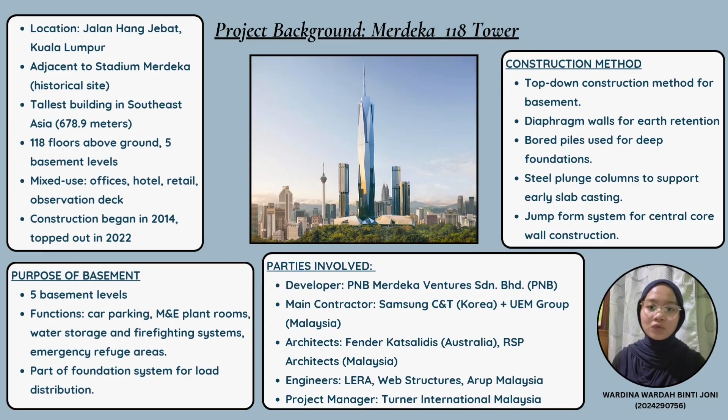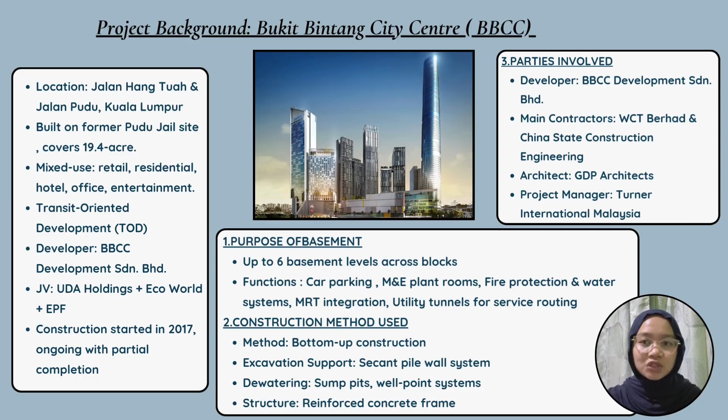So for the method used for basement construction in this project, BBCC used the bottom-up method, which means full excavation was done first, followed by construction from the lowest level upward. Secant pile walls were used for excavation support and groundwater control. Next, dewatering systems like sump pits and well points were installed to manage water levels. And the last one is the structure above is made of reinforced concrete, ensuring strength and long-term durability.

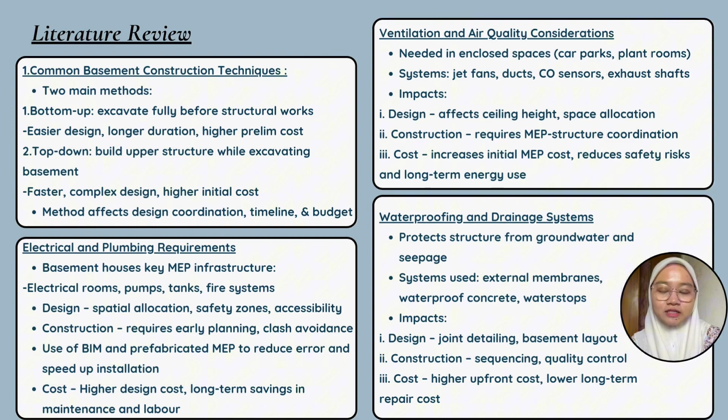Last but not least is electrical and plumbing requirements. Basements typically house essential mechanical, electrical, and plumbing components like electrical switch rooms, water tanks, and fire pump systems. These services require careful design planning to allow for safety zones, accessibility, and ventilation. So in summary, these literature insights highlight how basement construction involves not just excavation and structural work, but also careful integration of systems that impact design quality, construction efficiency, and overall project cost.

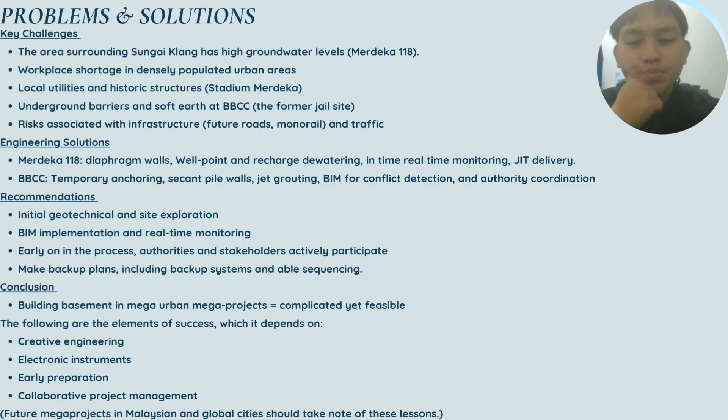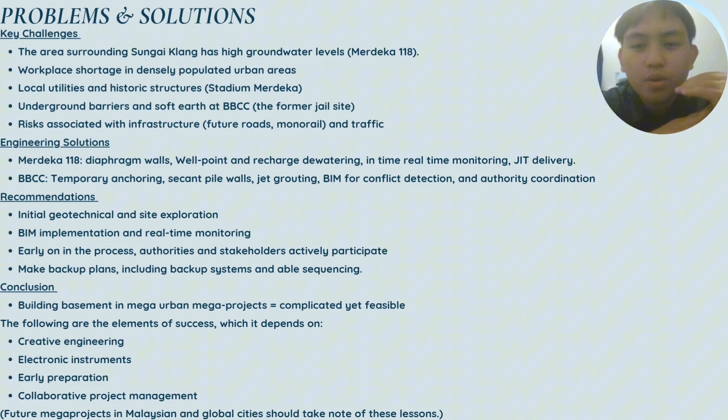At BBCC, they applied temporary anchors, secant pile walls, jet grouting, and used BIM for clash detection and better coordination with authorities. Based on this, we recommend early geotechnical site investigations. The second one is BIM implementation and real-time monitoring. The third one is active involvement of authorities and stakeholders from the start. And last but not least, preparing backup plans with flexible sequencing.

In conclusion, basement construction in urban mega projects is complex but achievable. Success depends on creative engineering, digital tools, early planning, and of course, strong teamwork. These lessons are crucial for future mega projects in Malaysia and around the world.

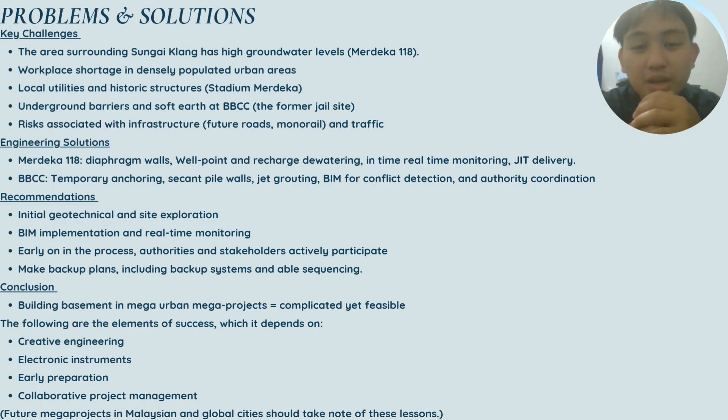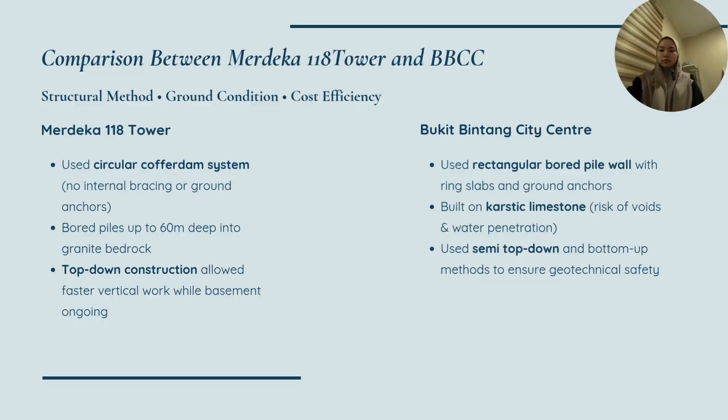From a cost and value perspective, both projects had different priorities. Merdeka 118 incurred higher initial costs due to advanced methods and materials, including ultra-high performance concrete. However, this was justified by a shorter construction timeline and strong long-term value, supported by green certifications like LEED and GBI, emphasizing sustainability. Bukit Bintang City Centre, on the other hand, focused on cost efficiency.

Their use of plunge columns allowed parts of the building to rise above ground even as excavation was ongoing. With a phased investment strategy, they could hand over components like retail areas earlier, bringing in revenues sooner. This approach effectively balanced cost control, safety, and practical functionality.

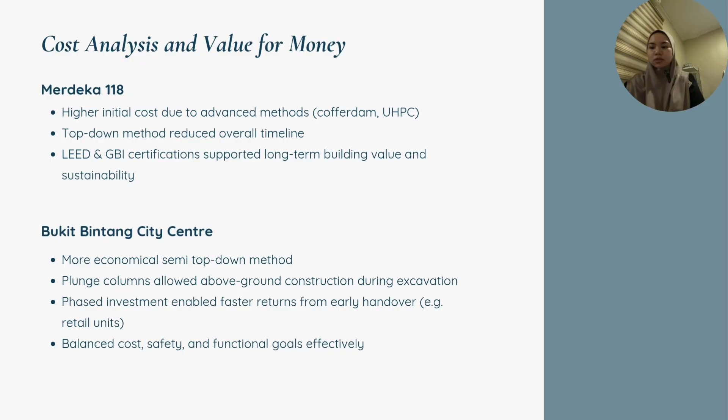So for the conclusion, both Merdeka 118 and BBCC are redefining engineering excellence in their own ways. Merdeka 118 stands as a symbol of supertall innovation. It features 138 drilled piles, a circular cofferdam into granite bedrock, and a semi top-down method for faster construction.

It was built using eco concrete, which is C105 MPa, achieving LEED and GBI Platinum ratings. It showcases height and strength with strong environmental values. Though the build required a high upfront investment, it delivered long-term value in sustainability and global prestige.

In contrast, BBCC reflects urban rationality and geotechnical care. Engineers used CBP walls, jet grouting, and staged construction to handle karstic limestone and the Pudu Prison legacy site. It prioritized cost-effectiveness, integrating MRT and LRT, using plunge columns and applying partial turnovers to enhance commercial success. Its design approach focused on functionality and safety with flexibility for mixed-use development.

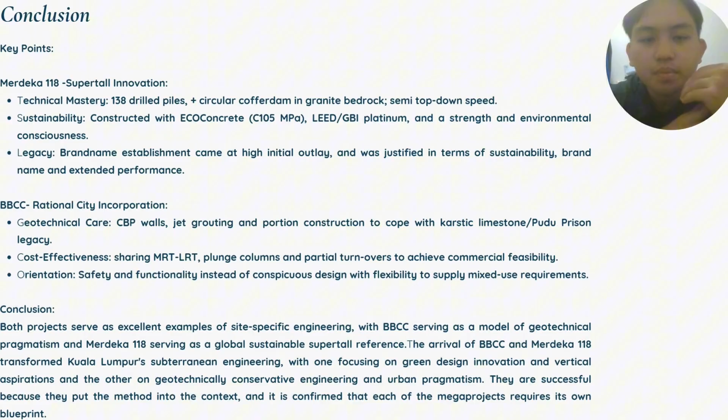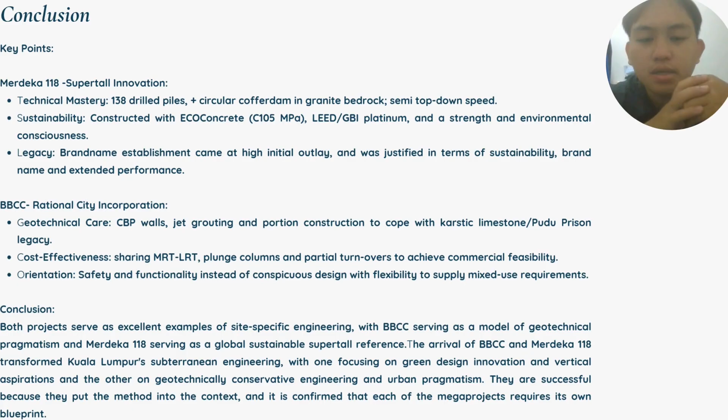In conclusion, both projects are powerful examples of context-driven engineering. Merdeka 118 represents a new global benchmark in sustainable vertical construction, while BBCC demonstrates pragmatic urban design grounded in local geotechnics. Their success proves that every mega project needs its own tailored blueprint, combining innovation, site conditions, and long-term visions.

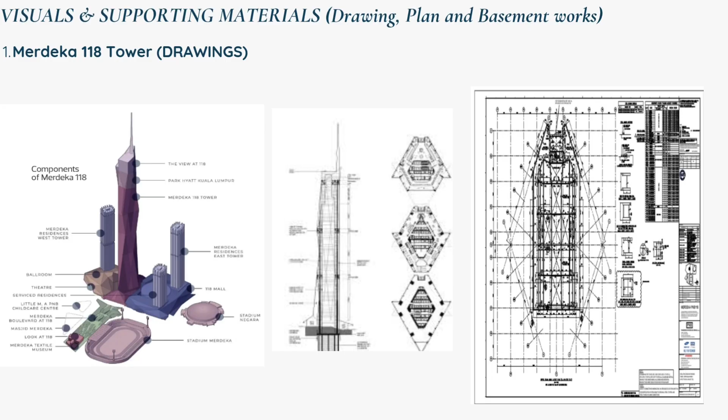So I will explain a bit about this floor plan because it is quite unique, which is Merdeka 118. It is a super tall skyscraper in Kuala Lumpur, standing at 678.9 meters. The floor layout follows a diamond shape, reflecting the tower's iconic architectural design. At the center is the core, which contains mechanical, electrical and plumbing, which is MEP systems, executive offices, staircases, and emergency shafts.

Surrounding the core are square-shaped office spaces, each about 10.5 meters deep, allowing for better natural lighting and flexible interior design. This layout offers several key advantages: first, efficient use of space; centralized vertical transport and services; and last but not least, improved structural stability through a strong central core.

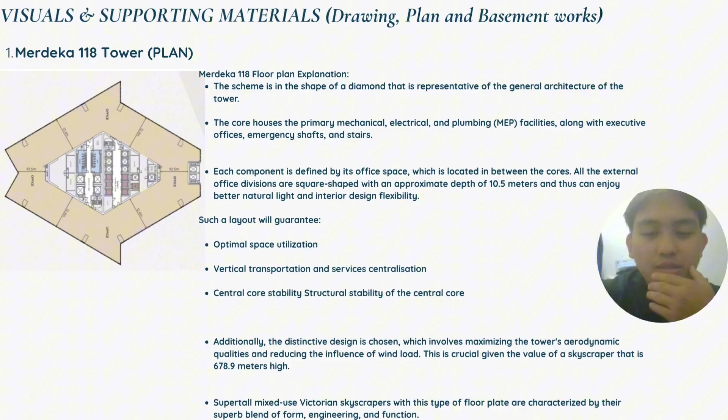The diamond form also helps improve the tower's aerodynamics, reducing wind pressure, which is essential for such a tall structure. So overall, this floor plan reflects a perfect balance of form, function, and engineering, typical of world-class mixed-use skyscrapers.

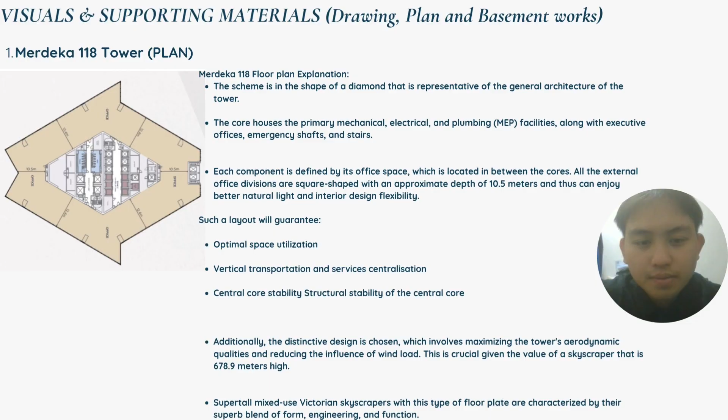meticulously carved into solid granite bedrock. This circular shape is not just aesthetic; it is a smart geotechnical solution for managing soil pressure and groundwater stability. To support this super tall skyscraper, engineers installed 138 deep bored piles, ensuring the structure remains stable for generations. Even more impressive, the project adopted a semi-top-down construction method. This allowed simultaneous work on both the basement and the superstructure, drastically reducing construction time without compromising quality.

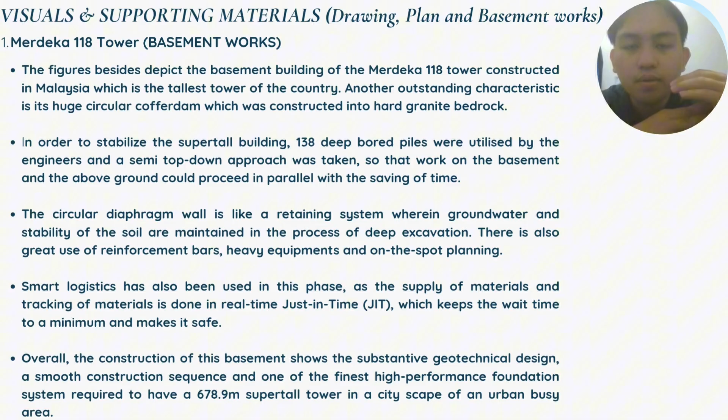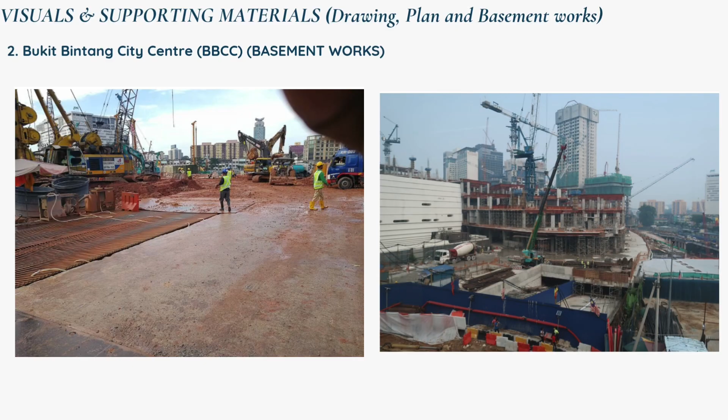Let's explore the remarkable basement engineering behind the Bukit Bintang City Centre (BBCC), a true showcase of how modern engineering meets urban challenges. First is the challenging site condition. The site sits on karstic limestone, known for unpredictable cavities and groundwater seepage, all made more complex by its historical location, the former Pudu prison. This called for adaptive engineering capable of dealing with unstable ground and sensitive heritage constraints.

Second is the innovative solution. Engineers responded with smart techniques. They installed contiguous bored pile (CBP) works to retain the excavation, then reinforced them with ground anchors and ring slabs to prevent lateral movement. In weak zones, selective jet grouting was used to strengthen the limestone and seal water pathways, a precise, targeted solution.

The third is phased construction for urban integration. To blend with the bustling city, BBCC adopted plunge columns, allowing structures like retail stores and the MRT/LRT interchange to rise above ground while basement works continued below. This strategy enabled partial handovers, speeding up commercial operations and proving cost effective in a dense urban setting.

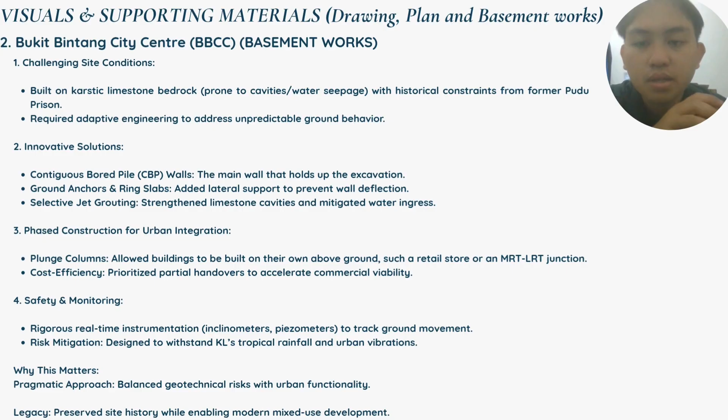So why does it matter? Because this was not just engineering, it was pragmatic problem solving. BBCC balanced geotechnical risk with modern functionality, preserved historical value, and set a new standard for urban mixed-use development.